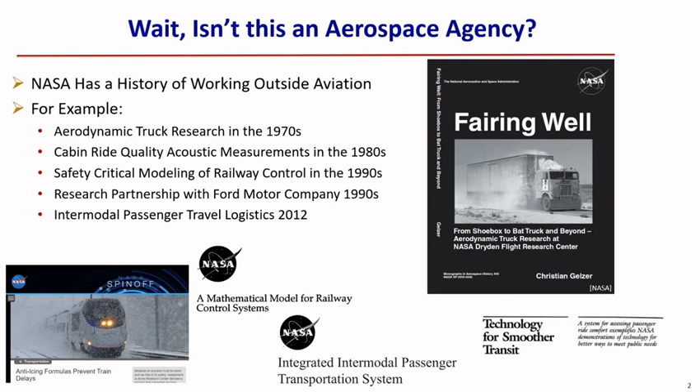I will step a little bit more detail into the aerodynamic truck research just as a great example of tech transfer coming out of the agency. This research started in the 1970s when a researcher at NASA Dryden was curious. There was also a gas crisis on, as to why American trucks were so unaerodynamic. And so they spent the next 20 years or so developing experiments and technologies to improve the aerodynamics and the safety of tractor trailers in the United States.

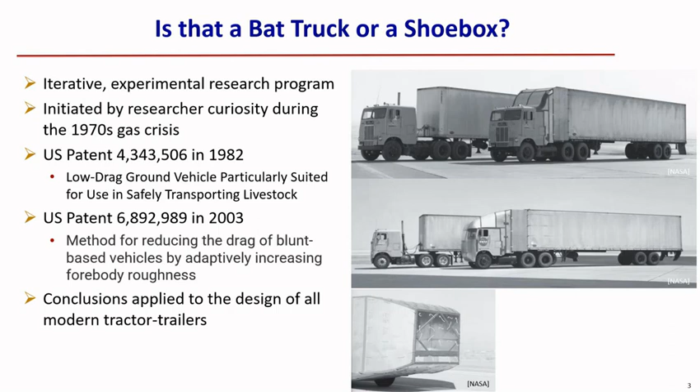They got several patents from it, including one for better airflow in cattle car trailers, which I've thought was a fun application of aeronautics. And their research can be seen in every tractor trailer you see on the road today, including the ever controversial Tesla semi there.

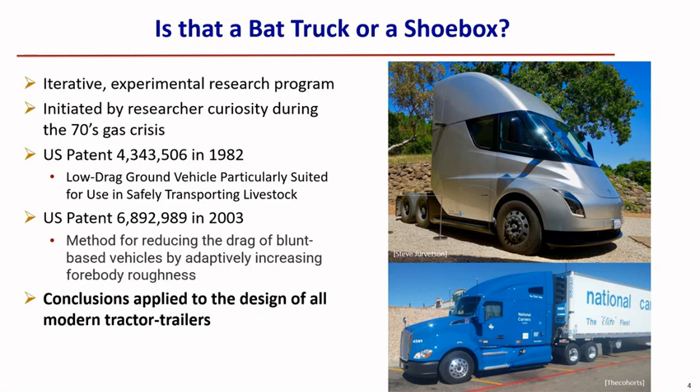So that's our history. What today says we should still be trying to work in areas outside aeronautics? First, in NASA's Authorization Act of 2017 and on and off several authorizations going into the past, it states that the administrator shall coordinate with other federal agencies and stakeholders on transportation research and innovation, including the Department of Transportation, whose purview is rail, trucking, etc.

As well as in NASA's strategic plan, a heavy emphasis on innovative technologies with a focus on sustainable aviation.

So what are the unsustainable areas of aviation today? Well, we have airport capacity issues. Slots are always a hot potato. We have a substantial labor shortage with both controllers and pilots, leading to odd regional routes being served by 757s with very inconvenient schedules. The form factor of modern aircraft, as seats get tighter and tighter, have become less accessible for people with disabilities and anyone who is above the size of the average American as defined by the Department of Transportation. As well as, of course, a very high carbon footprint, especially when it comes to short-haul domestic flights.

And this points to that NASA has got to consider some solutions outside of the aerospace bubble, specifically some of the solutions at the bottom of this carbon intensity chart, which is light rail and international rail.

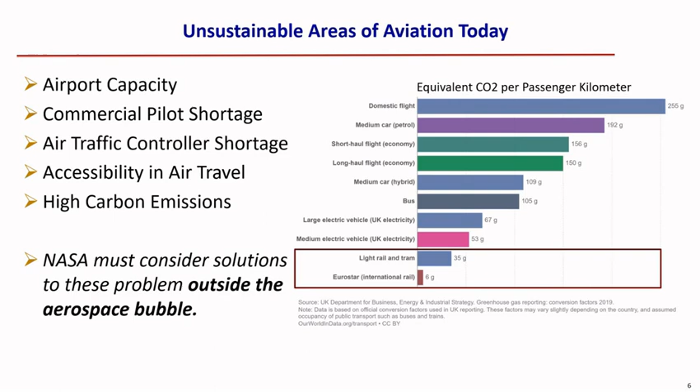So the gold example of rail in the world is Japan, and an excellent example relevant to the scales of regional transport in the United States is the Hokuriku Shinkansen, which travels from Tokyo to Kanazawa via Nagano and Toyama. It's about 2.5 to 3.15 hours, depending on how many stops it makes, and it's about a 250-mile long route. It opened in March 2015 as an extension of the Nagano Shinkansen, which opened in 1997, just prior to the Nagano Winter Olympics.

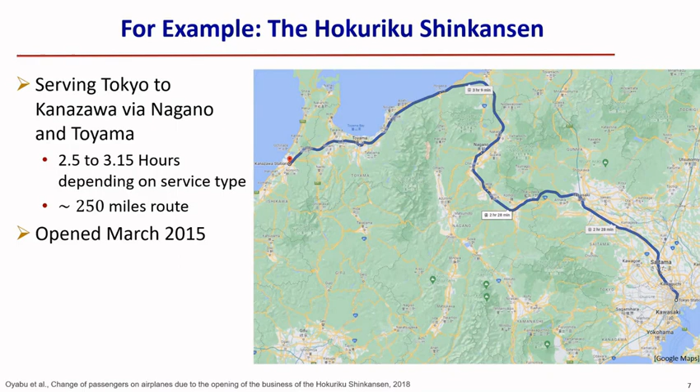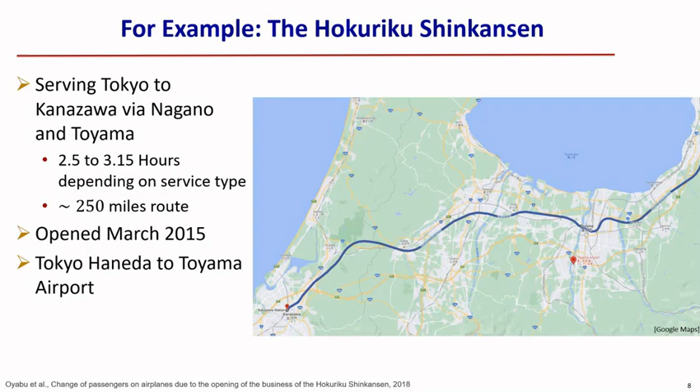The major route that was served by air prior to the opening of the Hokuriku Shinkansen was Tokyo Haneda to Toyama Airport. You can see Toyama Airport relative to the location of the rail route on the map here. Now, the route from Tokyo Haneda to Toyama Airport after the opening of the Shinkansen in the beginning of 2015 saw an 83% reduction in passenger volume that was directly moved over to the Shinkansen.

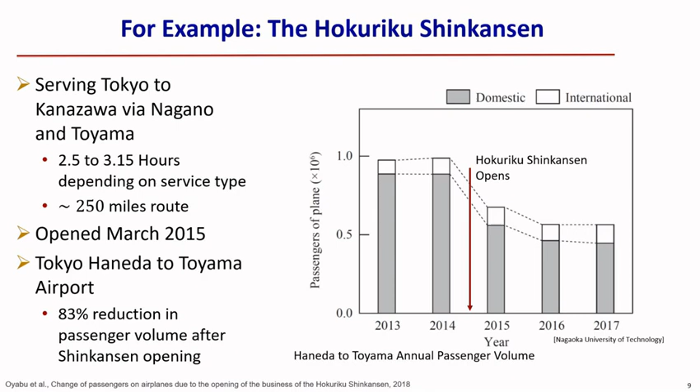Well, that brings up the question, wait, we're promoting air travel. We want better air travel. Isn't fewer passengers bad? Well, no. So a little bit of context.

Tokyo has two airports, Narita and Haneda. Haneda is in the city center, and Narita is about 45 minutes out on express train. Now, it's much more convenient to take a flight from Haneda, but there are very limited slots. And a lot of those slots historically have been taken up by domestic connections to places like Toyama.

But by removing the need to fly carbon intensive, low profitability domestic flights to these small regional airports, you have passengers fed into the air travel system via Shinkansen that are able to then fly on more profitable, more efficient long haul routes, particularly international routes.

We saw after the opening of the Hokuriku Shinkansen that several slots were opened up at Haneda, and the domestic airlines ANA and JAL were able to redirect those slots to profitable international flights that enhance the ability of Japan, a tourism-based economy, to bring in more revenue, as well as to make those airlines more sustainable, both per passenger mile and from a bottom line perspective. So that's why a well-developed transit infrastructure connected to air transport infrastructure can be a benefit to all parties involved.

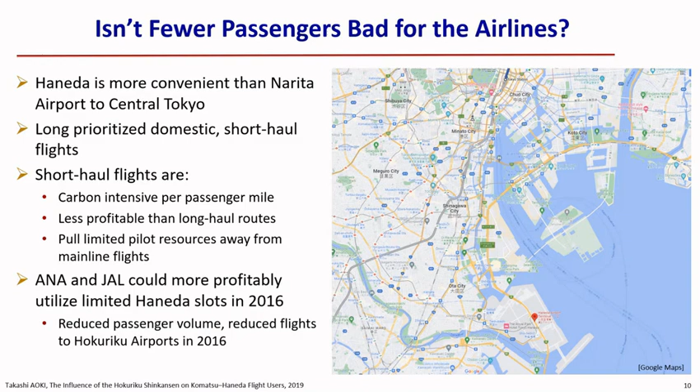Your next possible question is, well, the US is just so big, that won't work here. Well, first of all, we have a lot of rail corridors. We spent 150 years building rail corridors in the United States, and most of them still exist and are still in service. Now, I'm not suggesting you should take a train from LA to New York, though that is a beautiful ride if you've got a week to kill and nowhere to be.

But what's really of value is regional rail. That is city pairs connected between 50 and 500 miles. That's the distance that research has shown is competitive both in time and cost with air travel. And that factors in door-to-door travel, the remote location of airports, security, boarding, all of that overhead that you've got with what would ostensibly be an hour-long flight. It becomes a 5-hour-long ordeal, and that's where the train comes in.

If you can have passengers connecting into those hubs and onto your networks without having to expend resources and pilots on short haul hops, or as American has done in some routes locally, unreliable bus service, you improve the efficiency of the air network, you reduce the carbon footprint of that passenger's travel, and you increase the equity and accessibility of transport for every community along that route.

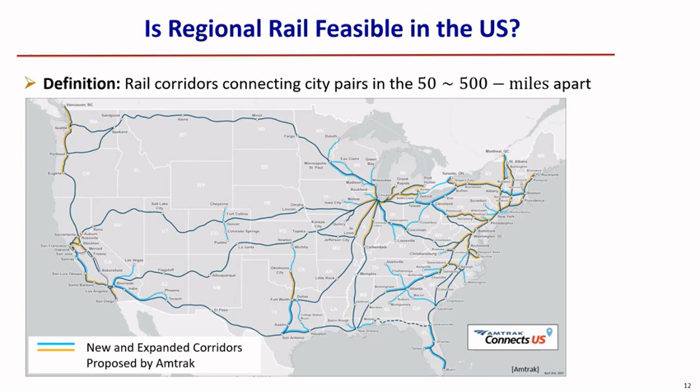So let's give you an example that's a little bit more close to home. We live in Hampton Roads, and the major metropolitan area of interest to us is the DC metro area. We are connected currently by the Amtrak Northeast Regional with a generous 2 trains a day. Yes, that was sarcastic, Bird.

Now, if you took that service up to a 1 to 2 hour frequency, regional rail between here and Richmond and here in DC, you enable connections to Richmond, Fredericksburg, Alexandria, DC, and destinations north with a low carbon footprint and an ease of access for the passenger.

You also gain connections to Richmond Airport, which already is right next to the rail right of way. You just got to build a station. You get connection to Ronald Reagan Airport in DC via the Yellow Line, and now, after a long wait, Dulles via the MTA Silver Line, as well as connecting, again, every community in between to all of those metro areas and all of those economic opportunities beyond just the transport logistics.

Now, there's some reasons why we don't have that today. Many of them are policy related, and I will not get into them today because legal told me not to.

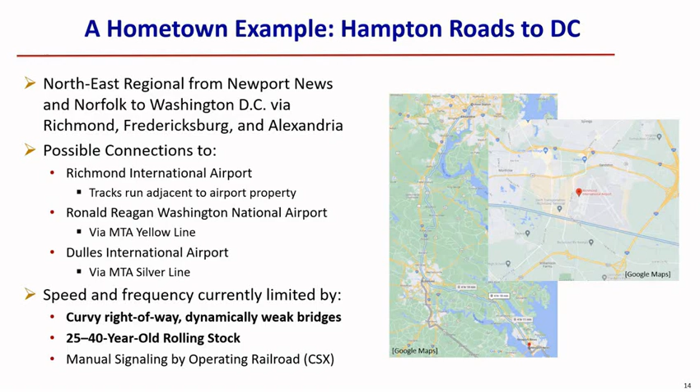That, again, is an issue for the Surface Transportation Board. Today, we're going to address the top 2 points, which can be touched on by NASA technology.

So the organization currently responsible for rail in the United States is the Federal Railroad Administration. And their premier research organization is the Transportation Technology Center in Pueblo, Colorado. They have extensive test tracks, test tunnels, the ability to move trains around at various speeds and configurations to validate their performance. However, due to cost cutting in the 1980s, operation of this center was transferred to an organization run by the Association of American Railroads in 1982.

Until 2022, they carried out essentially no research on efficient passenger rail for obvious reasons. However, in 2022, a research contractor, ENSCO, took over operation of the facility and is now refocusing on the national mandates for accessible, fast, and efficient passenger rail. However, because they are effectively a new organization rebuilding a capability, they've got excellent physical resources, but limited expertise in research and test. And that's where NASA can come into play.

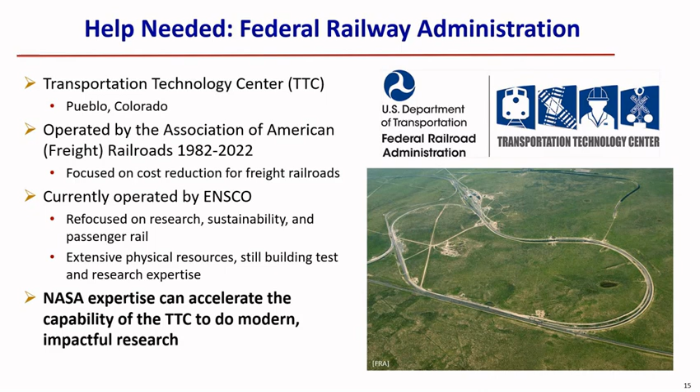So we've got our sustainable aviation mandate. We've got a federal agency that needs help. What are some cross-cutting areas within NASA that are applicable to rail technology?

Well, lightweight safety critical structures are a great one. Current American trains are about twice as heavy as their European and Japanese competitors. Of course, aerodynamics, drag, aeroacoustics, stability and control along curvy routes, passenger comfort and accessibility, operational automation, human-machine interaction, the safety of railway crossings, the environmental impact of different modes and connections and acoustics.

I could talk extensively on all of these points, but I'm going to spare you that, and unless you want to, over a drink another time, and focus just on one area of particular interest to me as a fluid dynamicist.

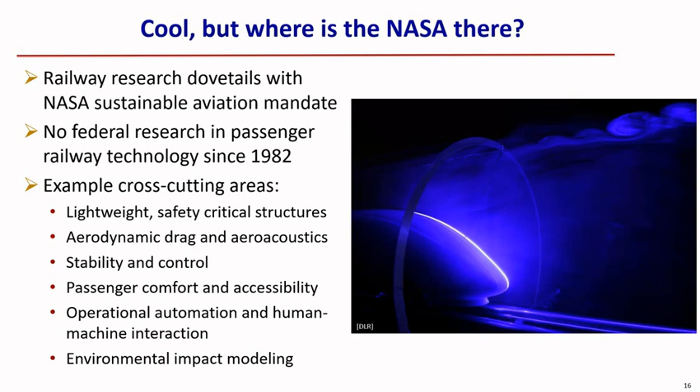Now, I'm going to play for you first the sound of a sonic boom from a NASA F/A-18, and then the sound of a tunnel boom from a German ICE-3 train. So listen carefully and see if you can spot which one is which.

How many of you think the first one was the plane? And the second one? Well, it was the first one.

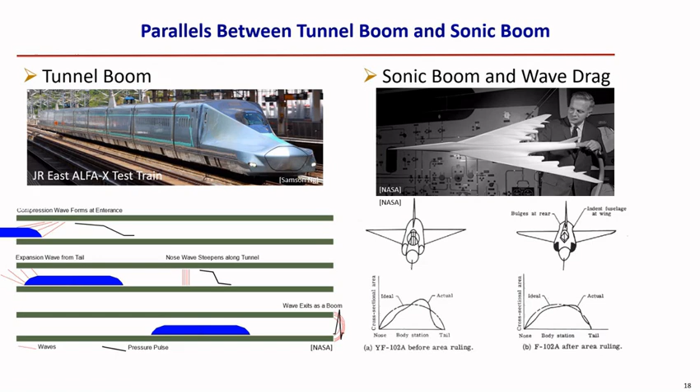However, the longer the nose of your head unit, the fewer passengers you can fit in it, and that's an operational constraint, as well as creating a complex geometry to mitigate that boom, has manufacturing limitations and operational limitations that have to be considered in a practical system.

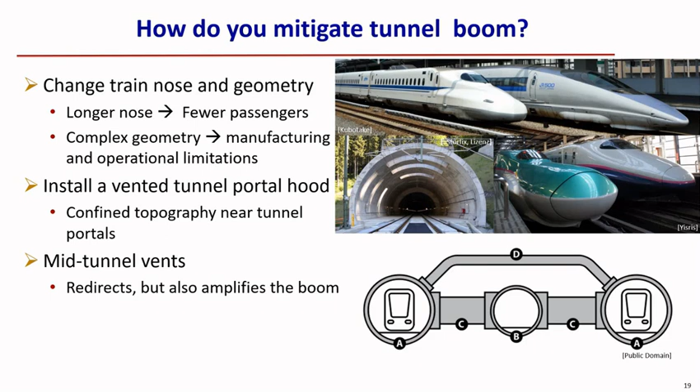A solution used by the Eurostar in the Channel Tunnel is to connect two different tunnels and have the pressure increase in one be vented to the other. However, it's a lot more expensive to build that kind of configuration than a single bore tunnel, and cost is king when it comes to public infrastructure.

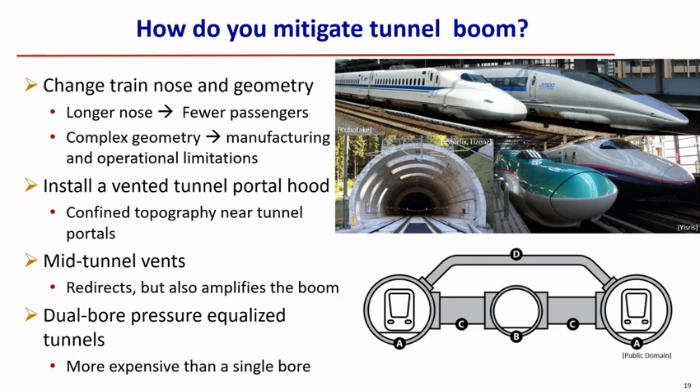NASA has capabilities that can address and improve each of these potential solutions to tunnel boom. We are a computational center of excellence. We have numerical codes that are best in class at handling compression wave and shock containing flows. We have experts in nonlinear acoustics, acoustic liners, and the atmospheric propagation of compression waves and shock waves and how they affect people and the environment exposed to them. That's a capability no one else in the United States has, and almost no one else in the world has.

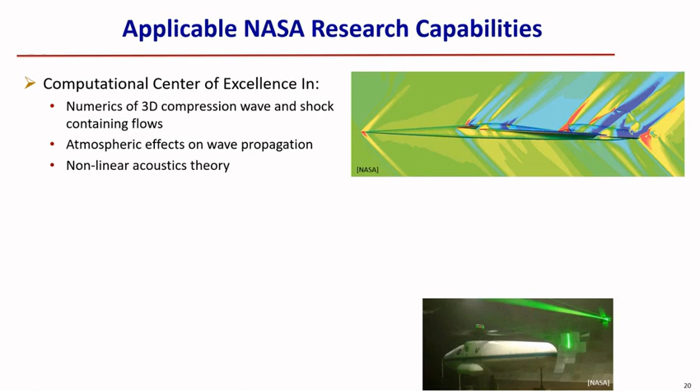Experimentally, and the area I care about most as an experimentalist, is of course the many wind tunnels and measurement capabilities: full-scale background-oriented Schlieren, which you can see applied here to a T-38 jet, particle image velocimetry, as well as the expertise to break a problem as complex as tunnel boom or sonic boom down to a tractable fundamental physics problem that we can understand and then apply to the system. That's an expertise we are best in class at.

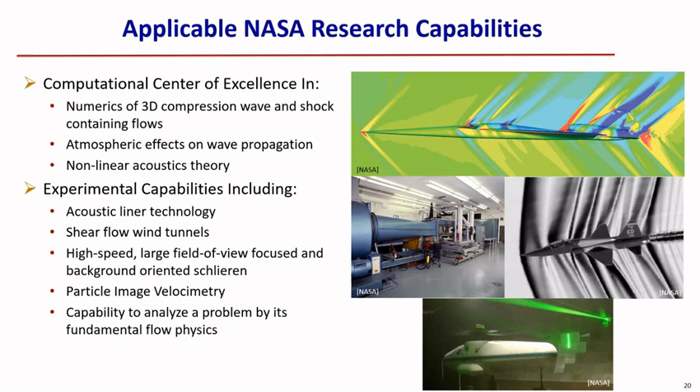Another area is, of course, the question of how you build a complicated geometry that would reduce the boom of a vehicle. On top, you can see the nose of one of the new W7 Shinkansens that operate on the Hokuriku route. This is handmade - there are craftsmen who hammer these panels into shape onto a form. There are some great videos on YouTube I recommend you check out of this process. The craftsmen describe that it takes three years just to understand how to loft the hammer, another two to understand how the metal responds to your hammer. And many of these craftsmen are not young.

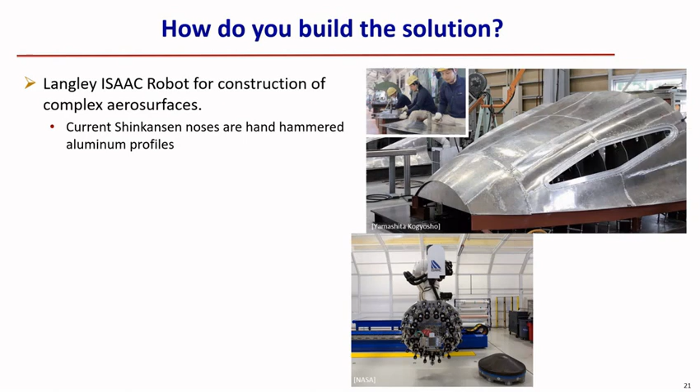That leads to advanced capabilities to manufacture weird shapes, like those necessary for the X-59, out of composites using facilities like ISAAC here at NASA Langley. There's also, again, an area of particular interest to me: opportunities for active flow control to both dynamically adjust the formation of those waves off of the train, but also attenuate them within the tunnel.

And then, of course, we are able to better understand how booms affect people and wildlife and how they propagate around different topographies, and what kind of liners or baffles would be helpful in mitigating these effects. That's an area we have extensive expertise in and continue to build on through the X-59 program.

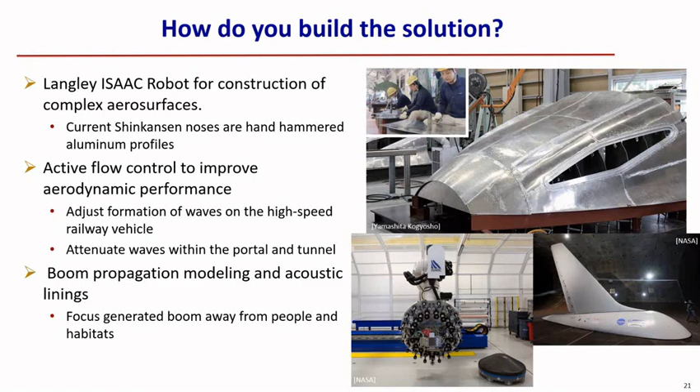So some key takeaways I want you to remember from today's talk: Yes, we're an aerospace agency, but we have a history of working outside of aerospace, and we should continue to do so. Integrating regional rail into our national aerospace network is a critical step toward a sustainable aviation future for the United States. We can help the Federal Railroad Administration with our capabilities today.

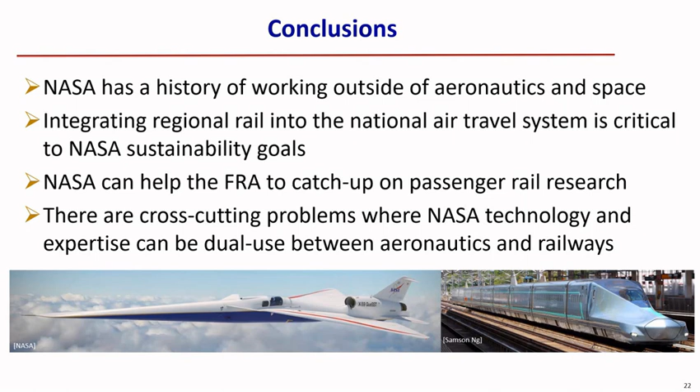And there are a lot of cross-cutting problems within NASA that are funded, ready to go, and applicable to these problems. So I'd like you to think about where your area of expertise might apply, and what it would be like to be able to hop a fast, efficient, and quiet train from here to DC. So if you've got any thoughts or questions, I'd love to hear them now. Thank you for your attention.